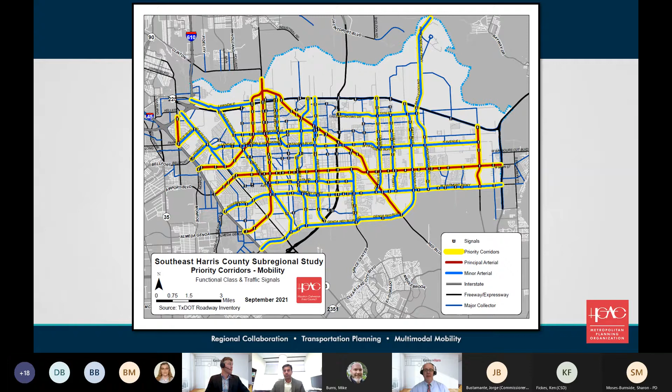Just a real quick review: these were the priority corridors for mobility that we were charged with studying, in the study area of Southeast Harris County. So this is what we were asked to look at. In terms of intersections for mobility, these were the intersections we worked out with HGAC and the stakeholders to study—I think it ended up being 107 intersections. The dots represent vehicles per hour per lane at those intersections.

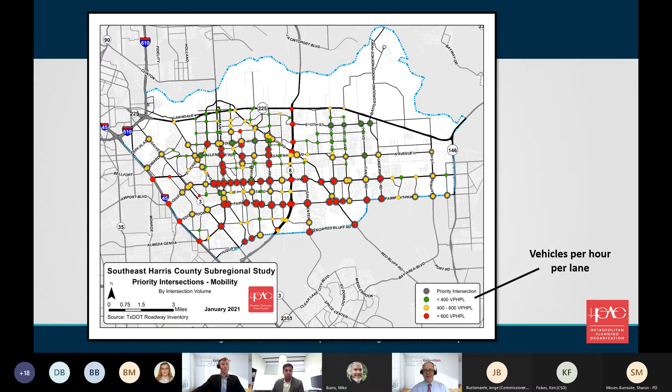Hotter colors like red have more traffic and hence congestion, and green is the mythological uncrowded intersection in Houston, with yellow somewhere in between. In terms of safety, this is a little review of the safety map. Those numbers at the top right represent crashes per 100 million vehicle miles, and a corridor in red or orange has a higher crash rate. The statewide crash rate for reference, for a 4-lane undivided facility, is 325 crashes per 100 million vehicle miles.

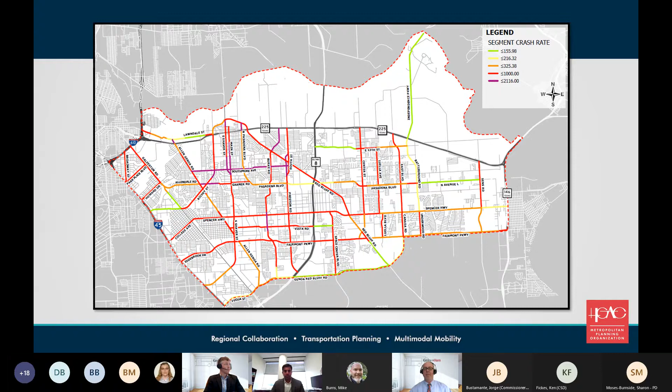So we have a number of higher crash locations here, and that's the focus of some of our recommendations in this study. There were over 6,000 crashes on the study corridors. Contributing factors included a lot of speeding, poor surface conditions, and some poor illumination and distracted driving also contributed a noticeable amount. There were some pedestrian and bicycle crashes in there as well. So this is what we got from the study area.

Michael, can I interject just really quick here? Looks like Bruce Mann has a question on the last slide. Sure, Bruce? Yeah, sorry, just really quick on the motor vehicle accidents—did you guys break down commercial vehicles and POVs? Peyton, do we have access to that data?

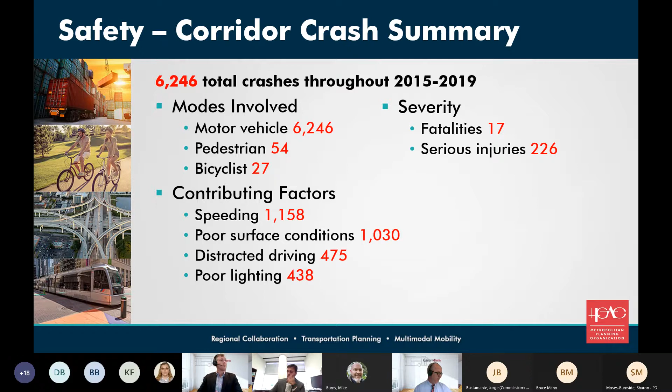No, we didn't break that down. I suppose we could. For the crash data, we got just the crash records. We'd have to pull the unit records and look at what type was included. But we can do that. That's a good catch, Bruce. So we'll do that, and I'll shoot you an email, and we'll include it in the next presentation. Thank you.

So again, here's the crashes, and KA is a fatality or injury crash. The darker red and purple colors are some of the highest crash locations. So we focused some of our efforts on those locations, though all locations got attention, those we gave some special focus to.

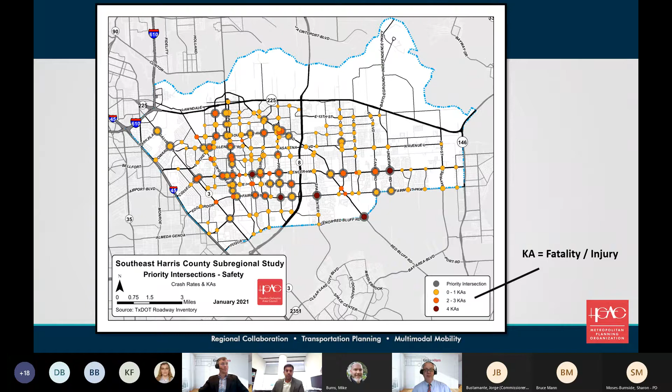Now we're going to talk about some draft recommendations. Some of these we'll just give samples on, and you'll see more later. Mike Burns and I will come out and meet with you over the next couple of weeks, for example to talk to Deer Park. I'm not going to bore everyone going through all 107 intersections here, we wouldn't have time. But we'll sit down with Deer Park, La Porte, the county, the city, and talk about their study areas and show in detail what we're proposing for mobility and safety improvements. Some of this we'll just sample, and the corridor-wide stuff we'll go through in detail today.

As far as vehicular safety, we've got a mitigation toolbox. We can do lane modifications, driveway configurations, channelization to improve operations and visibility at locations. Looking at sight distances to remove obstructions for safer operations at the intersection, plus illumination for nighttime operations and better signage for both daytime and nighttime. These are some lower cost safety fixes we can do.

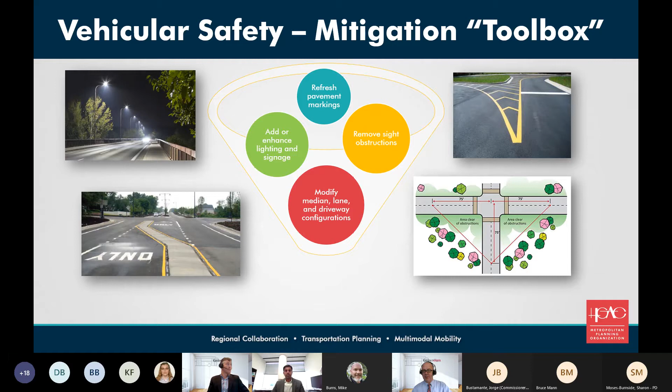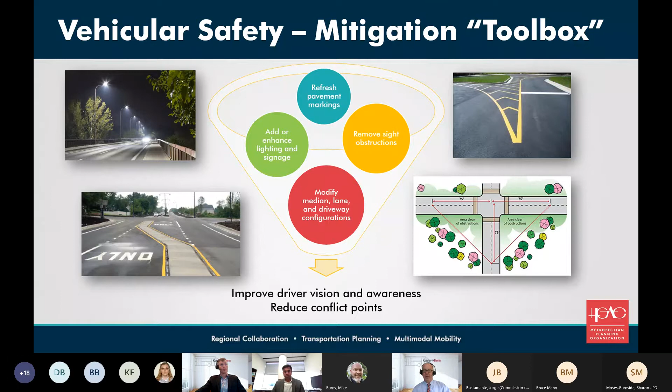Pavement condition is going to be a broad recommendation out of this, along with making sure the striping is done properly with current materials so the driver's path is clearly marked. This should improve driver awareness and vision, and where we can, we'll reduce conflict points to reduce the potential for a crash.

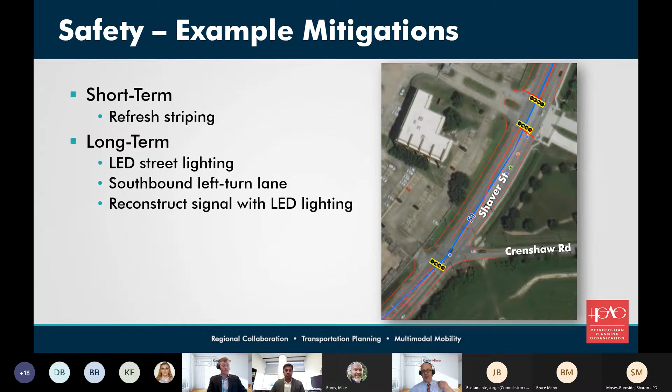An example: Shaver Street by Crenshaw Road. One thing we noticed right away is the striping is faded. You can refresh the striping and get improvements there. Longer term, we can add LED street lighting, a southbound left turn lane, and reconstruct the signal with LED lighting. So we're looking at short-term wins and longer-term things that may require more funding, coordinated planning, or right-of-way, which we know is a longer process. We'll go over these improvements in detail during individual meetings over the next few weeks. When we write the report, we'll associate cost savings with these crash reductions.

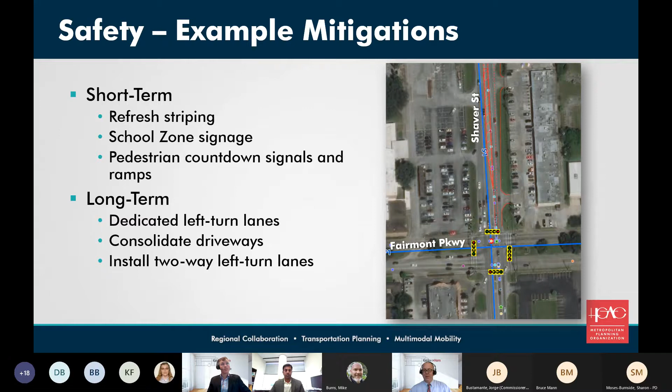Another example, Fairmont Parkway near Shaver Street. Short term: better school zone signage, adding pedestrian countdown signals and ADA ramps, and refreshing the striping, which should improve safety there. Longer term, we're talking about dedicated left turn lanes, consolidation of driveways to reduce conflict points, and potentially some two-way left turn lanes in certain sections. These are the types of improvements we're looking at for intersections to provide better safety, and some will spill over into better operations as well.

Just a couple examples of capacity recommendations from the 107 intersections. This is your distribution of level of service. If you're not a traffic engineer, level of service represents how well an intersection or piece of the transportation system is functioning, like grades in school, A through F, except they add an E in there. For urban operations, you generally want things not functioning worse than level of service D. E and F represent your 5 o'clock rush hour type operations, with a lot of delays.

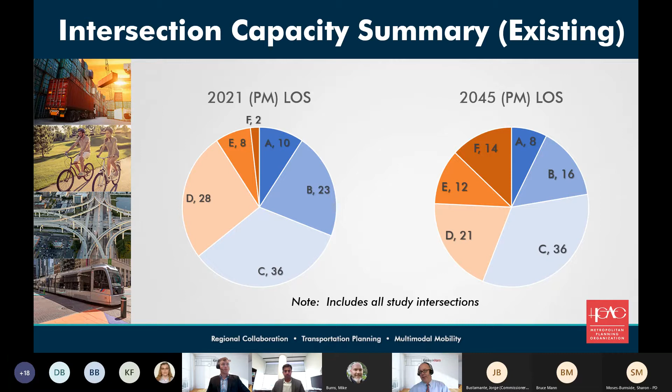So this is the distribution of the 100 plus intersections that we have. On the left is 2021 PM peak hour, on the right is 2045, the study year. As you go out in time with growth in the area, you're getting a lot more congested and overcapacity intersections. This is without any improvements.

So the capacity mitigation toolbox - one of the things that's come out in traffic engineering lately is the introduction of flashing yellow arrows. Most agencies have adopted them. We've got quite a few proposed in the area where it makes sense, and we'll review them with your staff at upcoming meetings.

The yellow ones are proposed, the green ones are already existing in the study area, and the dark black circles are areas where it's just not appropriate. We've gone through this with our subconsultant Gradient quite a bit, and this should help improve capacity at the intersections dealing with left turns.

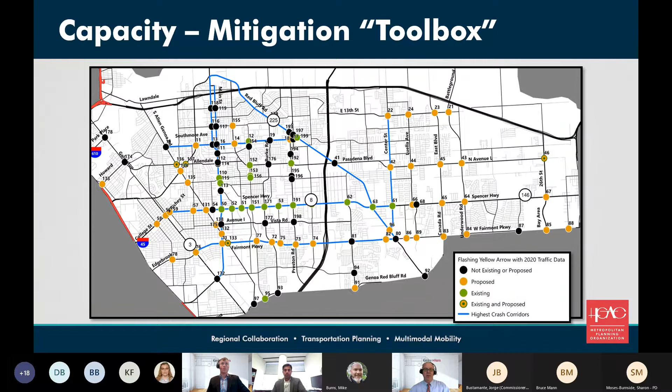If it requires right of way, we're generally calling it a longer term improvement, because you have to condemn the right of way or negotiate with that business owner, do any mitigation if it affects their property. These are some examples at intersections that would, by 2045, allow the intersection to better handle the growth, and perhaps better than it does now.

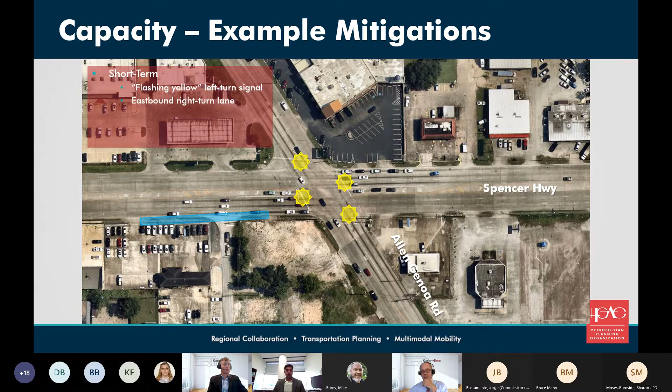Another example here of Spencer Highway at Allen Genoa. The flashing yellow arrows will help operations here. Eastbound right turn lane will allow those vehicles to get out of the intersection and operate more efficiently. Long term, we're looking at adding through lanes, so that's a little pavement widening - a longer term planning thing each entity will have to address. But this will provide acceptable level of service operations in the future.

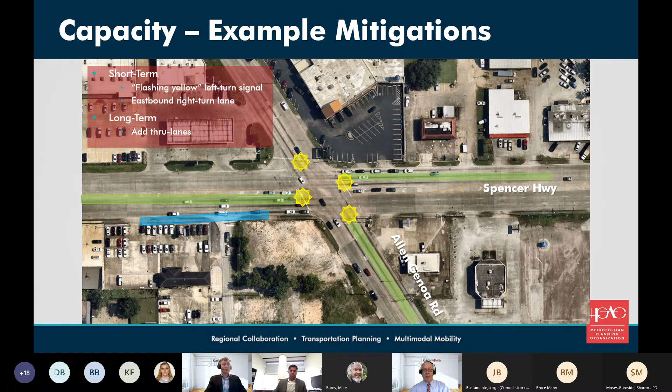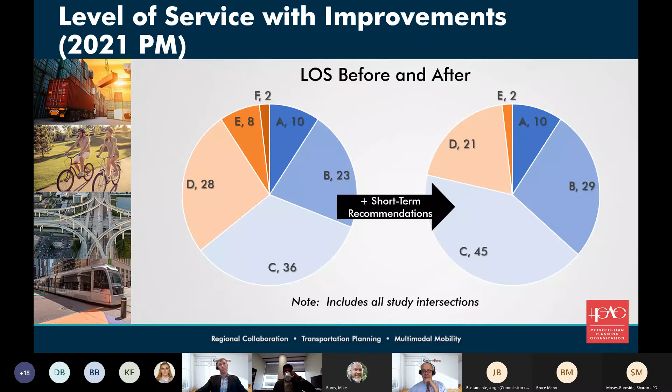Now we're going to go on to some area-wide recommendations. These specific intersection improvements - we're going to meet with each steering committee, Deer Park, the county, La Porte, Pasadena, et cetera, and go over these in detail in your area so you can really chime in with your technical people. We just don't have time today to go into traffic engineering wonderland. But now we're going to talk about some area-wide recommendations - these are a little bigger picture, but I think they'll benefit everyone in the study area.

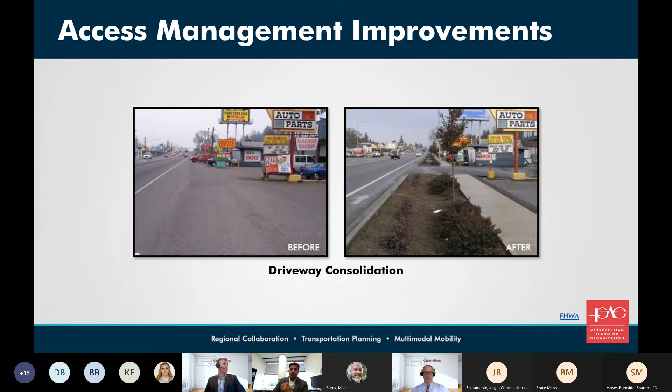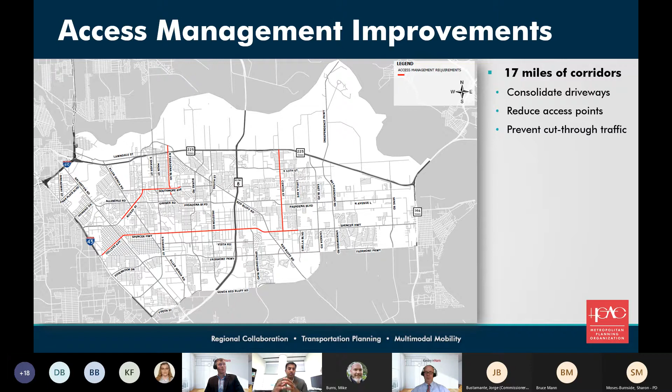So we came up with these red lines. What you see on the map are those commercial corridors where we see a lot of driveways and a lot of conflicts. We think there is a potential for access improvements here, where you could consolidate the number of driveways, reduce the number of conflict points, and thus come up with some safety benefits. We looked at crash data closely, and also land use and right of way, to see if these corridors could use potential improvements in terms of access management.

The next slide will show you a few pictures of improvements we're recommending for different corridors within the study area. On the left side, you see two-way left turn lanes, for example. Those are helpful when you have a lot of turning movements, both from the side streets and from the driveways. Those two-way left turn lanes act as storage. They provide an opportunity for vehicles to make a two-stage left turn, which helps take those left-turning slow vehicles out of the through traffic, avoiding rear-end crashes.

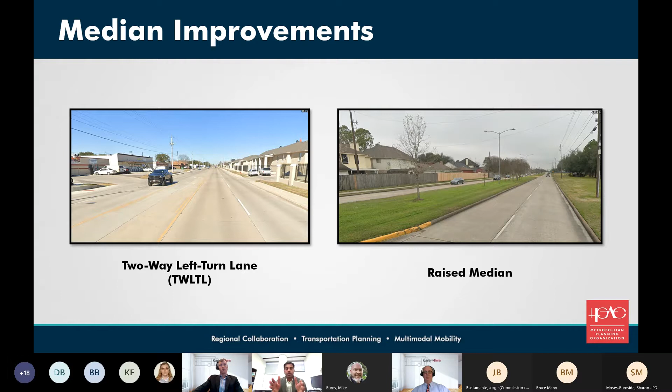On the right side, you see grass median, which is a raised median. Those are useful when you have a lot of pedestrian activity. When you have a wide cross section that pedestrians have to cross, those provide a refuge, so the pedestrians can make that crossing movement in two stages.

We also have a road diet. We identified some corridors within the study area which don't have a lot of traffic volume. They have surplus capacity, where we think those are good candidates for adding either a bike lane or definitely adding side paths, sidewalks, things like that. What you see on the left side is a 4-lane cross section with 4 lanes of active traffic, which is reduced to 2 lanes of active traffic on the right side. What this does is, pedestrians don't interact with as much traffic, and since there's surplus capacity, reducing the 4-lane cross section to 2-lane doesn't really impact the operations that much.

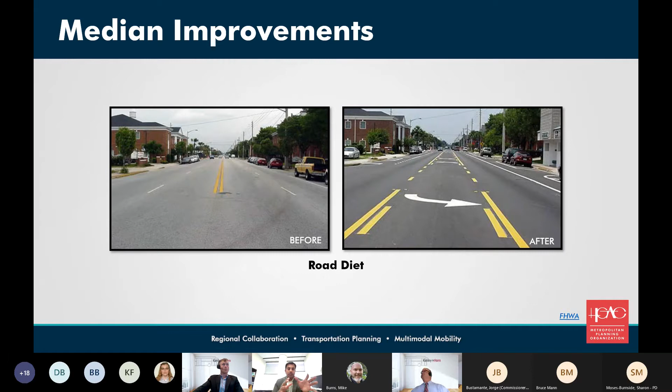With all these improvements in mind, we went through each corridor and came up with this map. What you see in the magenta or pink lines is where we are recommending the two-way left turn lanes, amounting to about 13 miles of corridors. For raised median, we came up with the orange lines where we are proposing raised medians, which comes to about 25 miles.

And roadway diet, those are the surplus capacity corridors. It's kind of hard to see them, but there's a few here - 4 miles of corridors: 13th Street, Park Place Boulevard, and West Vista Road right in the middle of the map. Those are potential corridors for road diets.

And reconstructing raised median, that's a unique one. Center Street, I'm sure you're all familiar with that one, has a raised median. Unfortunately, it's not to standards, and it has storage lanes for left turn vehicles, but that conflicts with the space vehicles use to make turns. So we need to improve that raised median and provide an opportunity for vehicles to store and also make those turns without conflicting with other vehicles.

So to come up with these improvements, we looked at the crash data. Same thing - we looked at turning traffic, the amount of right of way available, the number of driveways on each of these corridors, and the land uses.

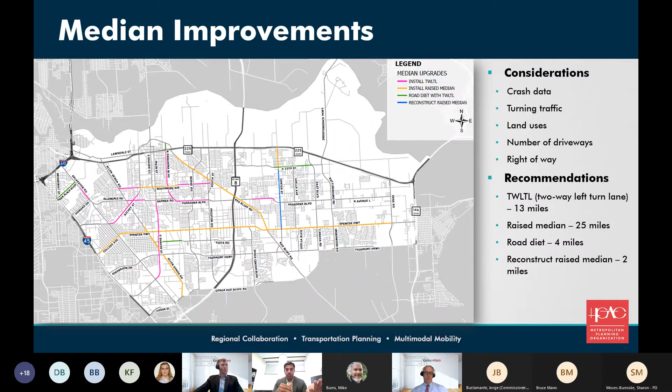Next, we looked at lighting improvements. We looked at each corridor to see where there is adequate lighting and where we could add more. Most of the existing lighting is not LED, which is obviously much cheaper and more efficient. We came up with about 44 miles of corridors, about one-third of the corridors we are looking at, which have inadequate lighting.

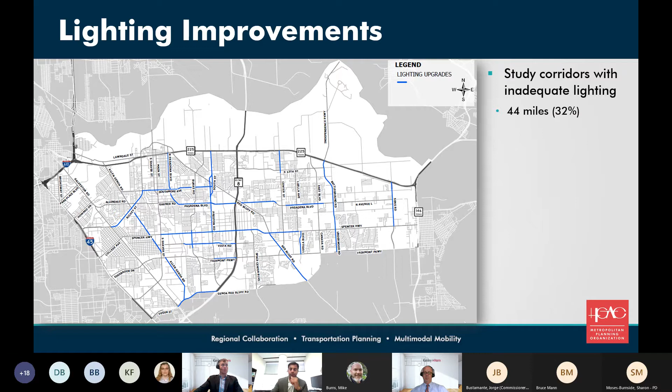Next, we looked at signal improvements. There are two types of signals we are considering for this project. One is mid-block crossings, where you have a crosswalk across the street, mostly near schools, where we could use a rectangular rapid flashing beacon, shown on the left, or a high intensity activated crosswalk, a HAWK signal. Depending on the speed of the roadway, number of pedestrians crossing, and number of lanes they have to cross, we come up with one of these two improvements for mid-block crosswalks.

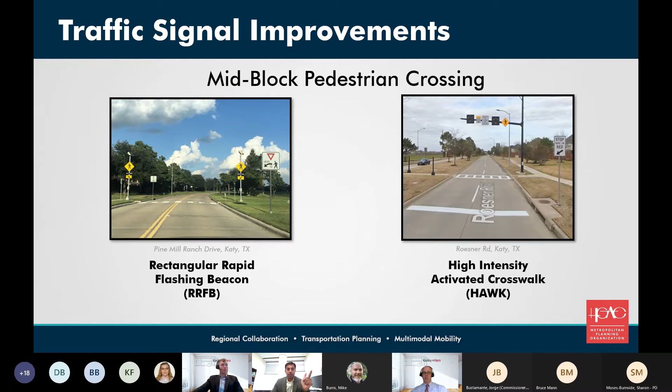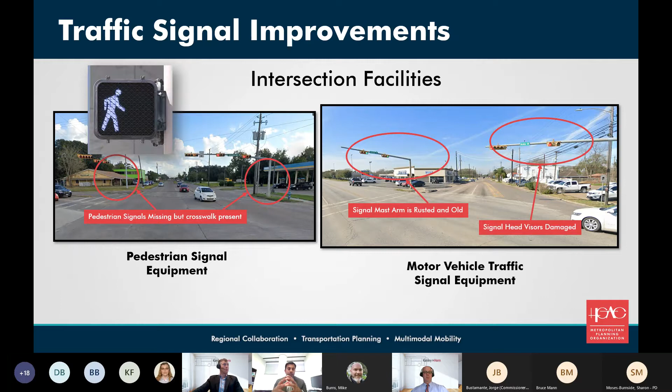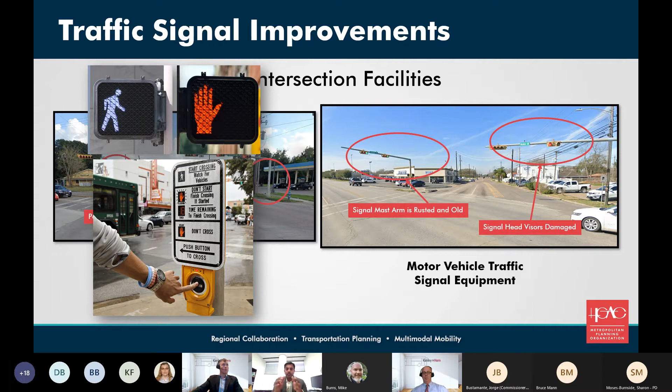Then we looked at intersections. On the left side here is a signalized intersection within our study area that's missing pedestrian equipment such as push buttons or pedestrian signal heads. We identified a lot of those intersections where pedestrian equipment is needed. On the right side, there is signal equipment at these intersections, but there are issues with the mast arms or poles—they're dented, cracked, or rusted. Also some signal heads are missing visors or aren't aligned with the middle of the lane.

I can pause and answer the question. Adam, feel free to go ahead and jump in.

That was great information about the lighting conditions. I was wondering, how do you determine if additional lighting is needed? How do you quantify that? Also, I always notice sign reflectivity at night—several signs here in Deer Park don't appear to be reflective at night. I've asked my engineering interns to clean the signs to see what it does, and it's not dirt or smog, it just lacks that reflectivity. So was that also studied? There are times you can barely see the sign, maybe 30 feet in front of you, and it's a speed limit sign.

Adam, that's going to be a global recommendation. It would take a lot of budget to go out counting every sign. I can't even calculate how many are there, but that'll be a recommendation to make sure all the signage meets the standards for retroreflectivity. There are standards out there, and we will provide a reference to those to make sure, whether it's a guidance, information, or regulatory sign, that it meets the standard.

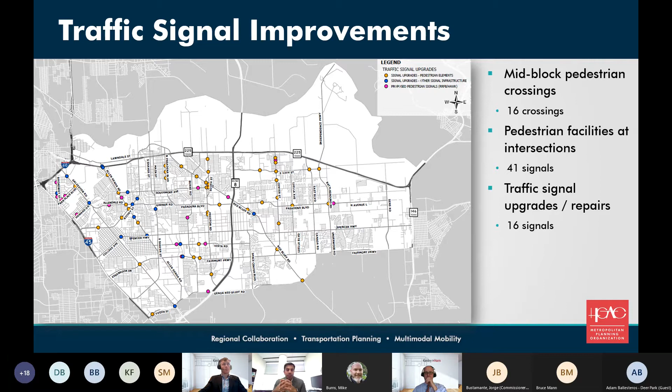This slide shows all the orange points which need pedestrian equipment. There are a lot of signals which need pedestrian equipment, almost 41 of them. There are 16 signals which need other equipment upgrades, and 16 mid-block crossings which could use either a HAWK signal or an RRFB. That's for the signal improvements.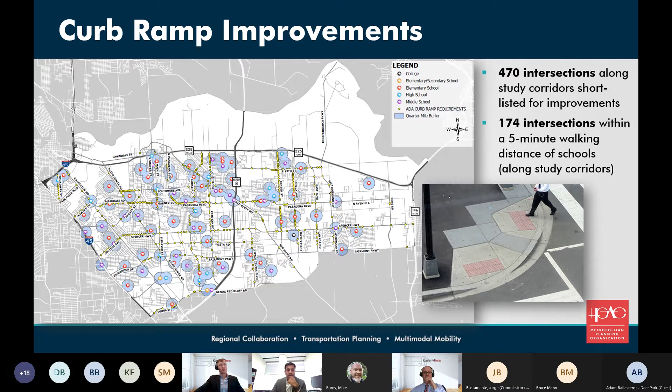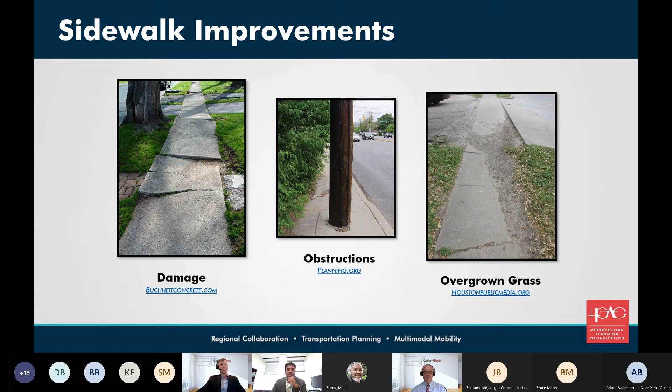Next, we looked at the sidewalks. Luckily there are plenty of corridors with good sidewalks. Sometimes there are issues like damaged or cracked sidewalks, sometimes obstructed with poles and other items, or covered with grass. We identify these as sidewalks requiring maintenance, and there's about 7 miles of them. There's 132 miles of sidewalks within the study area overall, which is pretty good.

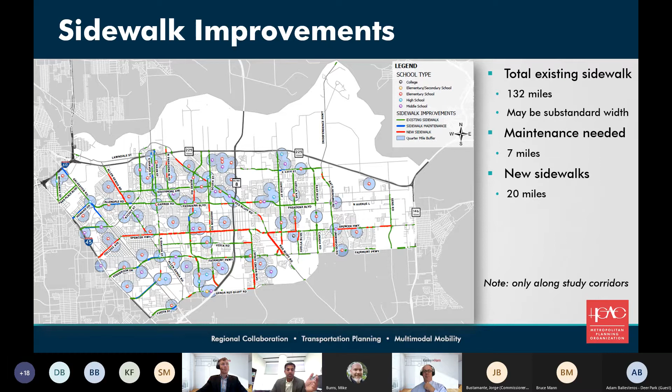Some sidewalks are substandard, but they still exist. We're also identifying sidewalks which are missing, about 20 miles of them, shown in red, so that's where we need sidewalks. What you see in blue is the ones requiring maintenance.

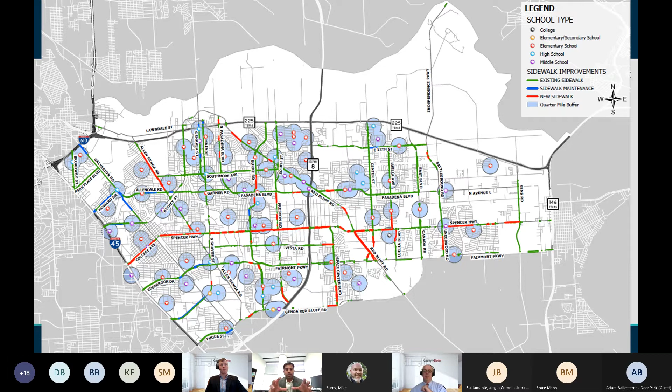Again, we laid out the schools on this map with a walking buffer around them to identify which corridors need more focus, being right next to schools. So that's for sidewalks. Then we looked closely at transit and bus stops.

A lot of bus stops are missing shelters, with more bus stops on the west side of the corridor and study area, and also the east side. We looked at those bus stops closely to see how many are missing shelters, and 84% of them are missing shelters. So there are very few bus stops with shelters. On the east side, it's the same thing - a lot of those red dots are all missing shelters, so pretty much on the east side there are no bus stops with a shelter.

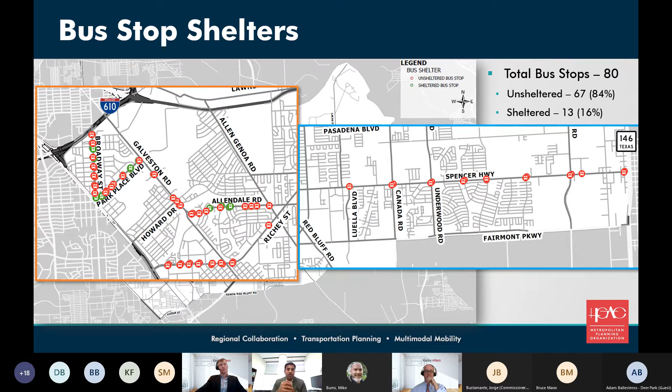We also looked at the lighting at bus stops. Lighting is definitely better than shelters - I think there's more lighting than shelters. About 57% of bus stops have lighting, and 43% are missing lighting. So those are definitely improvements we can start with.

With that, Mike, let me hand it back to you so you can talk about other transit improvements. Thanks, Reddy, that's a lot of information. Mike Burns will be sending you the presentation so you can look at these maps in closer detail. We know it was bigger scale, but it's a big study area, and we're excited to get some of these improvements out there. Now we're going to look at transit a little bit.

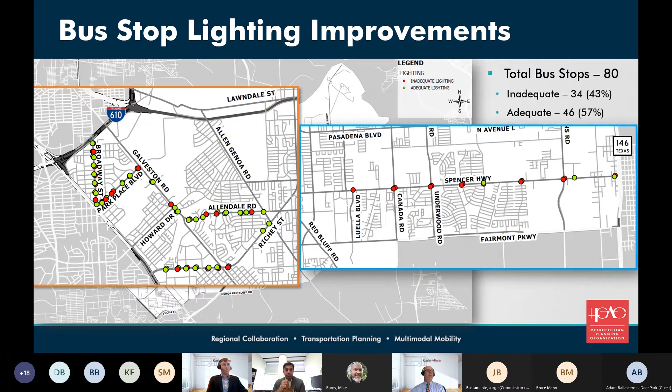I'm going to have Josie Ortiz, a planner with Kimley Horn, a very talented one, go through a few more active transportation topics. Hey everybody, good afternoon. So the first step was to look at transit.

We contacted the Harris County Transit Authority, and recently they did a study that compiled ridership data and did a large public outreach initiative to understand where people wanted to go in the area using transit. As shown, there were bus stops on the west side and bus stops on the east side, with a missing middle. Harris County's study filled in those gaps with proposed routes and stops, shown in the solid red lines in the middle.

As an overview, we were looking at where we could make additional connections that make sense. Along Spencer Highway, there was either proposed or existing service along the entire study area, except for that missing part on the west side. So we proposed another connection down Spencer to connect to the park and ride just east of I-45, to provide a more regional connection as well.

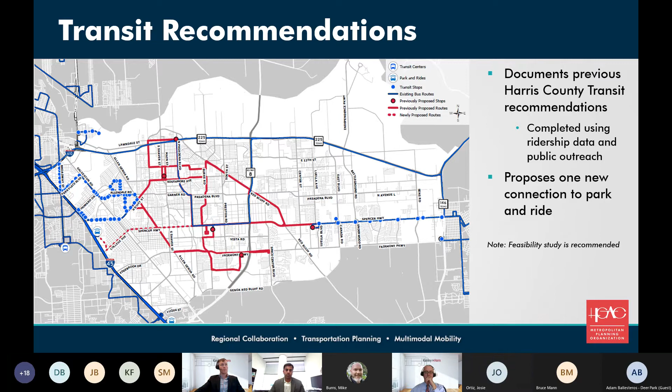One thing to note is a feasibility study is recommended for future study to figure out exactly what those routes and stops look like.

Before going into the bike-ped recommendations, I wanted to cover what a shared use path is, since we're recommending quite a few of them in the study. It's typically around 10 feet in width and separated from motor vehicle traffic. It allows for many different uses to access it - basically anything with wheels or legs can go on the shared use path.

It does provide connectivity to other bicycle and pedestrian facilities. You don't want to propose one that dead ends somewhere - you really want to provide overall connectivity throughout the study area. Although with the shared use path, because it's separated from motor vehicle traffic and sometimes off roadway, it doesn't always provide direct connectivity to destinations.

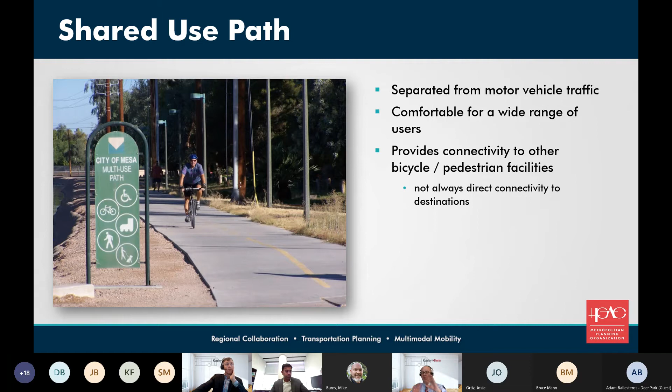Our charge is looking at more the spines of a bike shared use path network. The individual cities and the county would have to do the little fingers out into neighborhoods, but this would provide a network to build off of.

Our first step was to take previously recommended active mode facilities within the study area. There have been several studies done, including a Healthy Parks plan and the Livable Centers study. Deer Park has also been doing their own active mode recommendations. We wanted to take all of those and incorporate as many as we could in this recommendation - those highlighted blue lines are previously recommended active mode facilities.

Then we took what's existing on the ground, shown in dark blue, and there's one dark red line along Galveston on the west side. There's about 91 miles of existing facilities within the study area.

The next step was to connect those gaps, so this is where we proposed a lot of the shared use paths. The reason for that is because they are high comfort - it allows many different types of people to be safe while using them and feel comfortable while using them. There's about 244 miles of those proposed facilities throughout the study area.

A lot of them overlap with the previously recommended studies, but there are some additional ones, typically along bayous or utility corridors, that we've recommended to close those gaps. This would provide some true options for people to make non-vehicular trips, because it's an extensive network - it's what a lot of people in the public are wanting these days. So it's definitely eliminating some gaps, as Josie said.

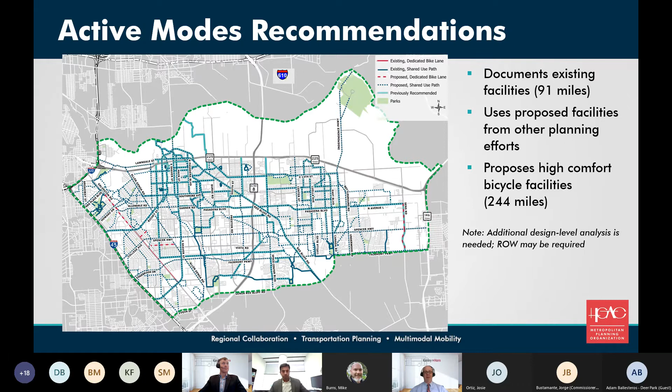All right, so moving on, we also took a look at some thoroughfare recommendations. We didn't find an overarching thoroughfare plan for this area, obviously because it's split up between several different municipalities. We did incorporate the city of Houston where it exists on that west side. But going from there, we wanted to look at that typical thoroughfare grid. You're looking for about a mile in between corridors for the larger classifications, and then as you get down to the minor, you're looking at that quarter to half mile connectivity.

So we did a deeper dive, looked at some areas where maybe we could propose some things. What you're seeing on the screen now with all the solid lines is where the classifications have right-of-way that directly correspond with what we've recommended. In the legend, sufficient width means no additional right-of-way is required for that classification. Expand right-of-way means a little bit of right-of-way widening would be needed. That doesn't always necessarily mean a roadway widening, but right-of-way widening. And then new proposed right-of-way is where there's no existing right-of-way currently.

So the dashed lines you can see there, that's again where we're proposing some expanded right-of-way to help with the connectivity. And then the new proposed roadways in the dots. I know this is a lot to take in, and you're probably looking for those roads that are in your municipalities, but again, we can do a deeper dive in this with those follow-up meetings.

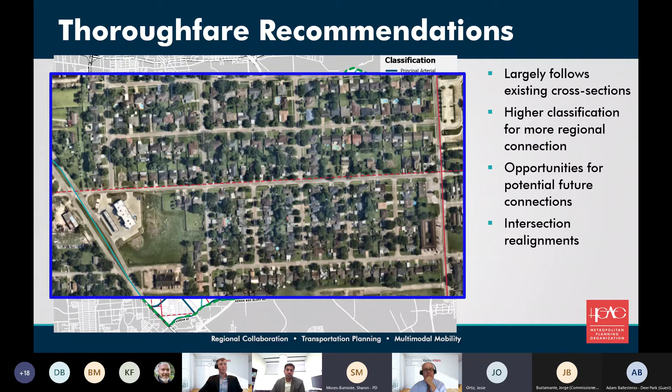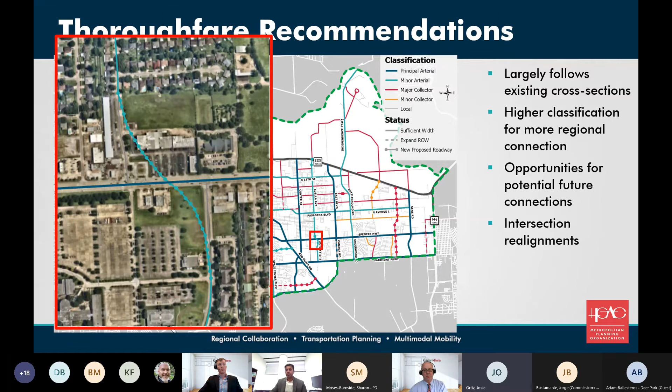This is another proposed connection. You can see those existing streets coming from the north and the south are offset at that intersection. This is a general proposed connection of those two roadways to make it more of a streamlined connectivity.

Same thing here, going from west to east. That is an existing neighborhood with an existing street on the west side, and on the east side, I believe that is a Harris County flood control district. Again, these are very long-term recommendations. Thoroughfare recommendations are typically 30 to 50 years out, so just a discussion that would need to happen.

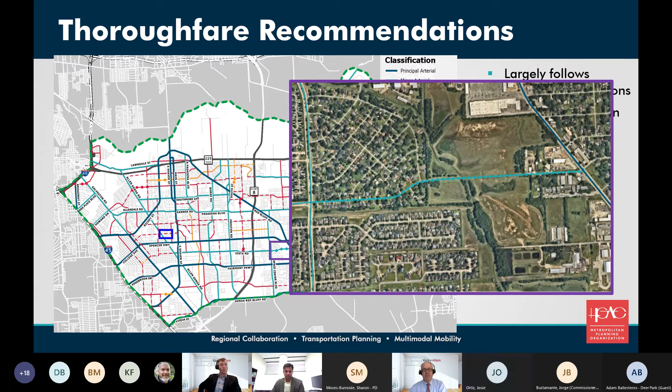Thanks, Josie. I know this is a lot, and we will have some time for questions. But next steps, we're going to start scheduling meetings with you individually - the municipalities, Deer Park, Houston and Metro, LaPorte, Pasadena, the county, the port, any others we are needed or requested.

We only showed a couple samples of intersection safety or intersection capacity improvements. We can go through in great detail all those within your jurisdiction or that you have an interest in. We can also print out some of these maps on a bigger scale, like the thoroughfare plan things or some of HDR's work on the sidewalks, and go through and mark those up with you and your staff. I would encourage you to get some of your technical staff involved in these meetings, because they tend to get the calls for the headaches from the public.

I think this will be critical to go into more detail. There was no way to present it today without having a seminar as opposed to a meeting, and your eyes kind of get tired after 107 intersections too. So at these meetings, we'd look at safety and operations focus, the intersections, the corridor, the active transportation, any other big picture improvements that you may have in mind.

And then things like Jorge said, hey, let's A/B the shared use path plans and see what you said versus what we said. We'd like to dovetail to the extent possible with anything that any of you have been working on. There's still some more public outreach to do.

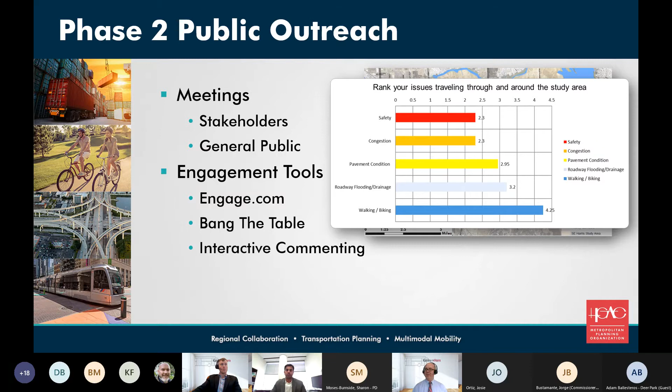We can do surveys, we can pull out a lot of information from the public. That went smoother than I thought last time. So kudos to HGAC for setting up this Bang the Table platform and their engage.com website, because I think it'll let more people participate - they're like, hey, I only have to pay attention for an hour or two as opposed to 3 or 4 hours and drive there and back.

So a couple things behind the scenes that are going on. HGAC's modeling team is using software to take a look at study area wide and corridor level statistics, but with these improvements, the changes in travel time with less congestion, the trip paths may change. So HGAC's talented modelers, Megan and Chris, will take a look at that. It'll implicitly model transit, and we have some rail and freight analysis in progress right now. So Bruce, that may be of interest to you, but that'll be something we're coming up with shortly, and we'll reach out to you about.

So I know this was a lot today, but we're really into the meat, the fun part. Thank you all for providing all the input. I think we've gotten good input across the board.

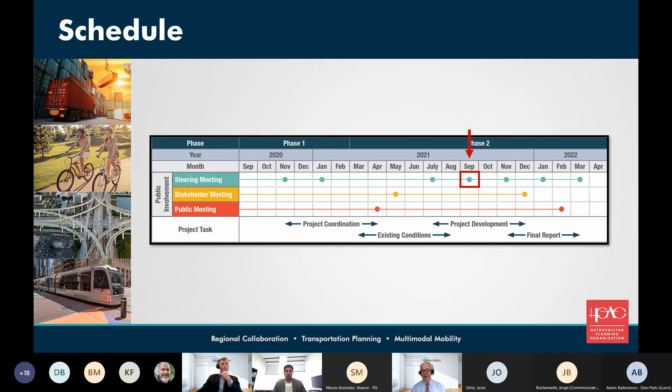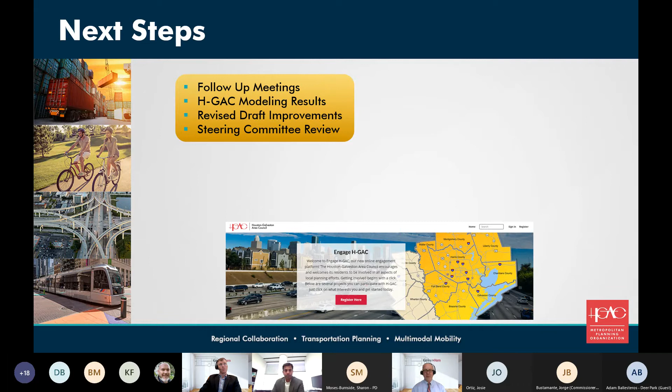So we're on schedule. I'll go to the schedule we showed earlier. We have some more public outreach, some more steering committee meetings. So the next steps, we're going to set these follow-up meetings as the next big set. We're going to incorporate HGAC's modeling results. We may revise some of our draft improvements because of that. We've got additional things like freight and some rail crossings we have to present to you next time.

The steering committee is always going to get a chance to review it. We'll go to the stakeholders, the public. Steering committee reviews it. Once we get some draft final improvements, we're really going to start working on the report. And the draft report obviously will be circulated for everyone to have a chance to have their input on it.

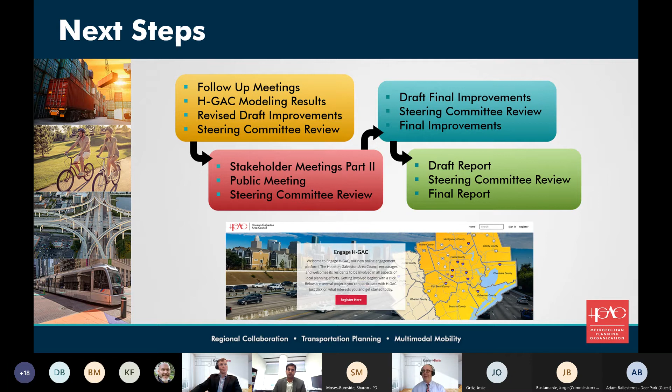And that's the path. We're really in the meat of it, the fun part when we're rolling out improvements and everyone can see them. And kudos to everyone too. I think we're still on schedule. And since we started this during the height of the pandemic and everyone was learning their way, thank you for all that. So did you have any closing remarks before we go to questions?

No, I think the balance of this time is used to get feedback, and I see Bruce Mann has his hand up. So Bruce, feel free to jump in with a question or a comment about the presentation.

Yeah, so I'm going to have some broader comments, I suppose. There was a lot here, obviously. The first thing I think of is, okay, fine, what's the ballpark price tag for all of this? Because there's a lot there.

A relative ranking of priorities of some of this stuff. You touched on this, freight's not so much in here, and this is the breadbasket of freight for the region. So that's a huge, huge, huge component.

And then the last comment is kind of bigger picture, and I'm going to have to run after this, I have a 10 o'clock TxDOT meeting. But it's the timing. I'm a little concerned about the timing because I'm not even sure how far down the road TxDOT is with the 225 study, and these were really supposed to be parallel. I think it's important that these two studies work together because 225 is a huge corridor. This obviously ties into it. I would want to not put a final bow on this thing until we really get that 225 study done by TxDOT, to make sure that there's alignment between these two studies. So those are the comments I had.

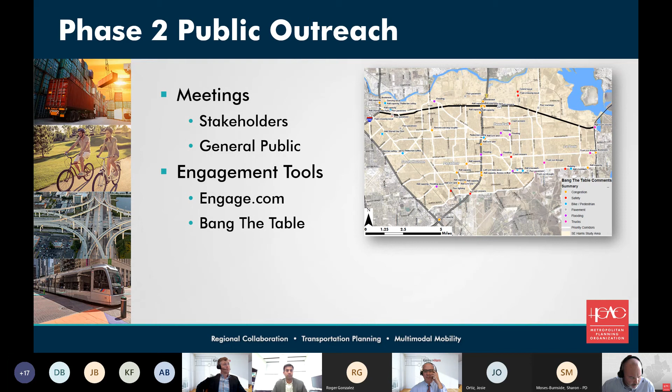Adam Ballesteros, and I see Pasadena is on the call as well, Sarah Benavides. Sarah, I got you on kind of late, I'll change my attendance here, but was there anything from your city that caught your eye here that you want to ask about before we have our individual meetings?

Not to put you on the spot, but I'm putting you on the spot. If she's not there, then Adam, was there anything to follow up on that really caught your eye? We had some, was it the 13th Street road diet that was being recommended, some flashing yellow signals that weren't necessarily existing in the Deer Park area on our maps. Anything you want to offer now before we have our individual meetings?

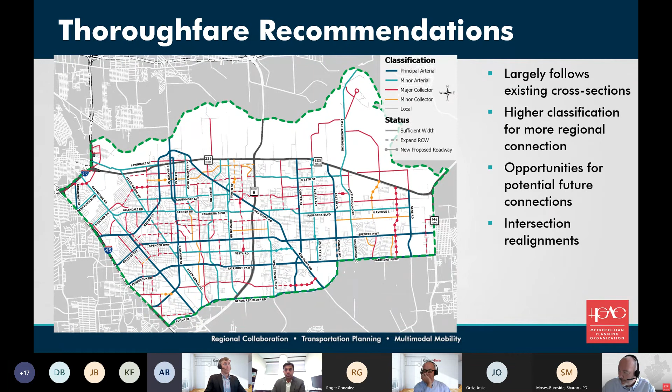I guess a couple things. The Public Works Director, Bill Peterson, he's been working with TxDOT on the other side of the meeting. I can't remember, I think the gentleman's name might have been Bill that was speaking before, to kind of make sure that we have that cohesive interaction there with them.

I know that in addition to traffic and everything else, flood control is on everybody's mind. I know that Bill, when he's been talking to TxDOT, they have some restrictions on the flow of water across 225. I think that's probably something more they'll talk about in their scope. But anything done like that in our jurisdiction, we'd certainly like there to be either some improvement, or if it's going to be the equivalent impervious surface placed, just to say, hey, while you're there, you might think about upsizing the drainage or something to that effect.

I don't know whether the city would have cost participation, or flood control, or Precinct 2, or us, or something like that. But that's just one more thing to look at. If something's going to be improved on the road, we might as well put some pipe in the ground and do some improvements while we're there. That's just a little thought, not to complicate things, but know that's another thing we're thinking about here.

That makes sense. Mike, we're looking to kind of handle things like flood control, resiliency, and those kind of things. It's bigger picture. We're not doing a drainage study here, but we have some ideas on a few things where there might be opportunities. We have a fantastic regional drainage guy in our office, and once we get finer tuned with these things, he's going to take a look and give us some suggestions on drainage improvements.

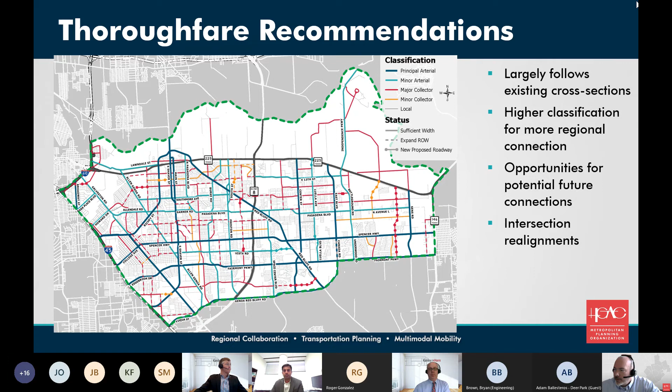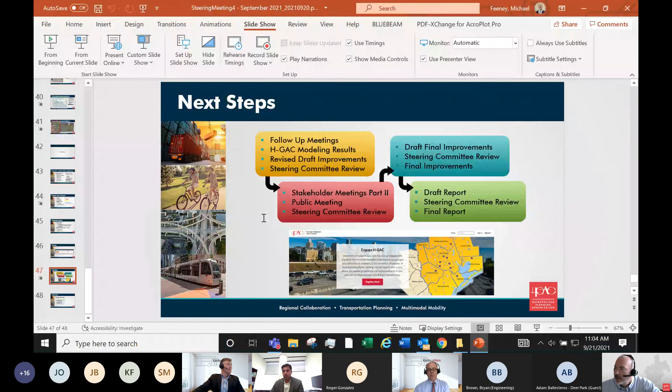Anybody from HGAC have any questions? Chris Van Slyke, did you see anything you want to comment on? No, I'm good.

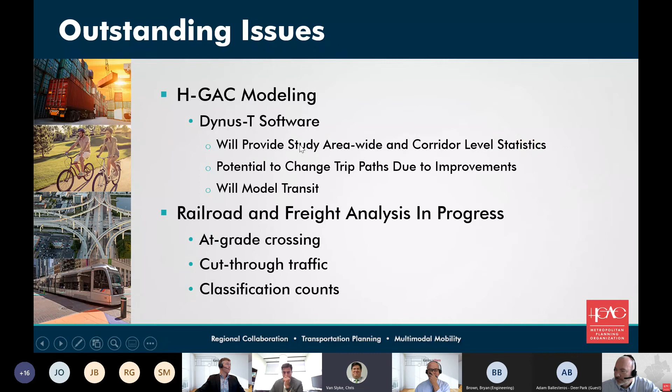As you know, I have staff now working on the network recommendations on all of the sub-area studies, so I assume, Kimley, you will transmit your recommendations ASAP? Sure. Okay, thank you. Megan, do you have anything to say? I'm good, thank you Chris.

Okay, and some last folks here. We did Catherine Parker—we didn't touch too much on the rail crossings, but I know that's something we are doing analysis on. Mike, do you want to talk to the rail issues, or Catherine, do you have anything you want to comment on about what you saw?

No, I'll wait to hear what you all have, and go from there. We are looking at them. There's a couple spots that are interesting. So yes, we're trying to make them less interesting. Some passive crossings. I'm sure they are interesting. All right, thank you.

And then City of Houston, Donald and Sharon, it probably seems like a good idea to bring in a Metro representative to an individual call. Does that sound like a good idea to talk about the bus stops and thoroughfare recommendations? Yeah, Mike, and I think in our case too, it will be good to pull in traffic folks as well as stormwater planning folks. So when you are ready to send a doodle, let me know, and I can give you some other emails to include, because it'll be good to have them at the table as well.